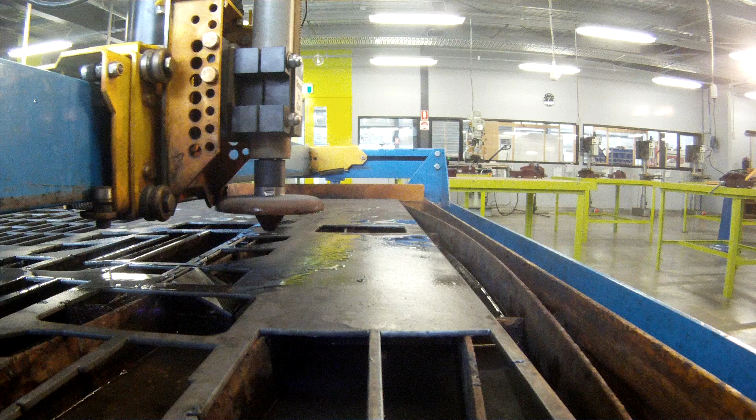In today's video, I'm going to show you how to design and make a fabricated vise via the use of Autodesk Fusion 360, CNC and manual machining and fabrication processes. So sit back and relax and enjoy the video. Let's get started.

Okay guys, so I've exported the DXF files out of Fusion 360 and brought them into the Plasma CAM design software. I've nested all the DXFs together to minimise waste on the steel sheet. So let's press cycle start and watch this cutout.

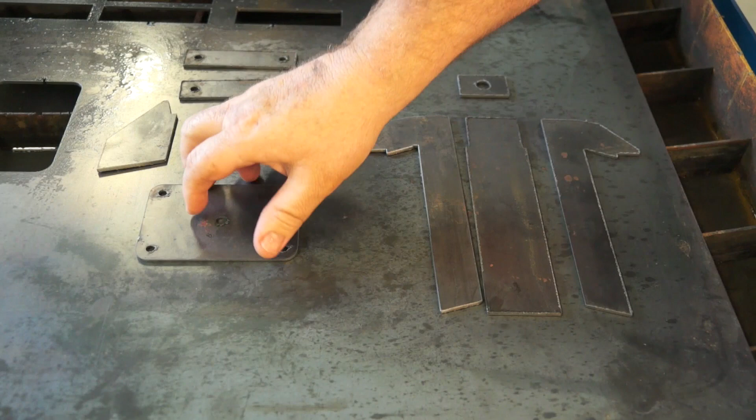And then we have it. All the parts have been cut out with the Plasma CAM using a Hypertherm 65 amp. I had it on a medium setting at about 45 amps, and it's done quite a good job. There's a little bit of dross on the back of these parts - we'll clean that up with an angle grinder and a flapper disc. But overall guys, I'm quite happy. How cool is that? Straight from Fusion 360 into the Plasma CAM, and I've got steel parts. Awesome.

Righto, I've cleaned all the parts up using the angle grinder with a flapper disc, and as you can see, it's taken off all that dross on the edges of the steel. There was no need to actually grind the hell out of the parts, just had to take that dross off so they'd fit together snugly.

Now if you look over here, I've started to assemble the vise. I've placed the first two components on the welding table. This welding table is made in Germany - it's a Siegmund table, and they're an awesome piece of kit. You can fixture it and clamp it up so it won't move. When I start to weld, I'll do about 4 welds in here - not a continuous run, just 4 tack welds along there, and that should hold it all together.

Now what I like about this design of the vise is that I've designed it so it fits between the gaps in my welding table. And this, of course, being a school for students, you want to try and make this as easy as possible for the kids so they all achieve their goal. Just got to work this out - watch out, this table is hot at the moment and I should have gloves on.

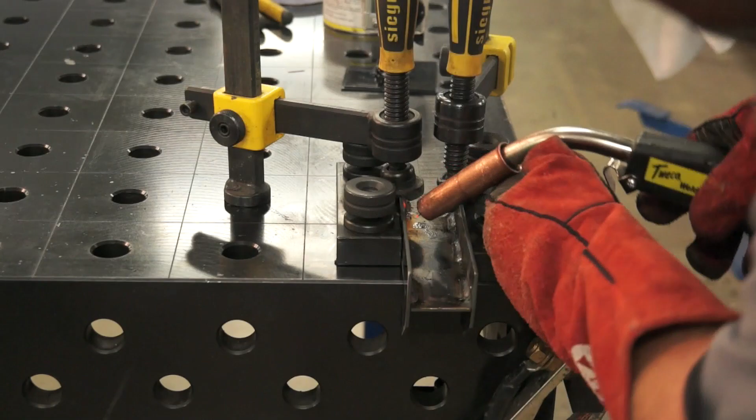As I was saying, guys, I'm not a ticketed welder. However, when you use a good quality MIG welder and a welding table like this, anyone can become a self-proclaimed expert. I'm pretty happy with those welds, even if I do say so myself.

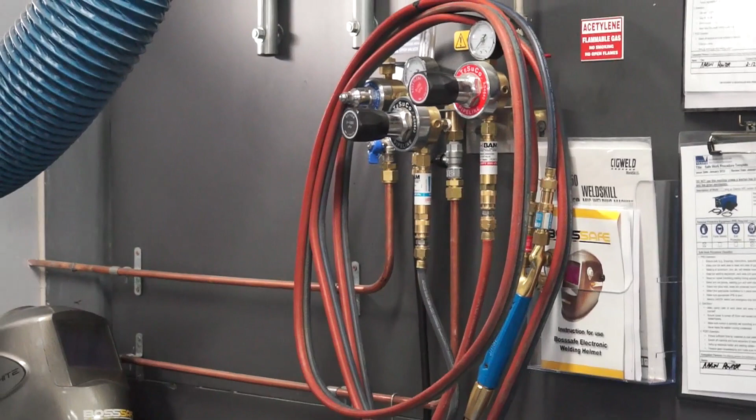Now, if you're wondering what welder I'm using today, let me show you. The welder I'm using here is a CIGWELD Weldskill 350 MIG. It's 3-phase, 415 volt, and it's plugged into a manifold system over here. I don't know if you can see the argon shield line, the blue tap in behind the other ones there. I'm running about 12 litres a minute with argon shield gas.

Okay, I've got the other parts clamped to the welding table. Here's the outside rails, and I've wedged that between one of these square parts here from the welding table, and clamped that together so hopefully it won't move when I weld it.

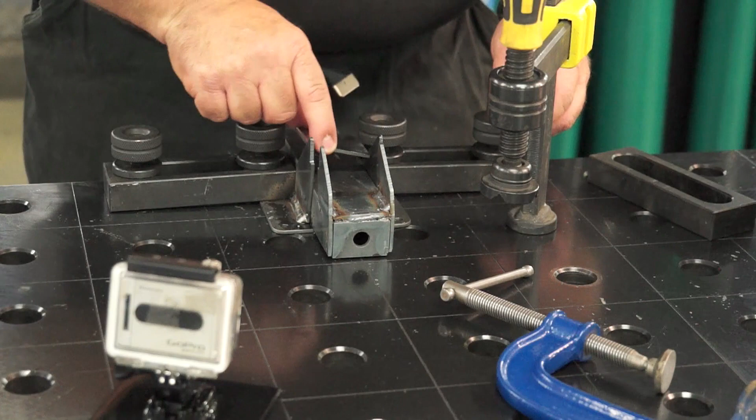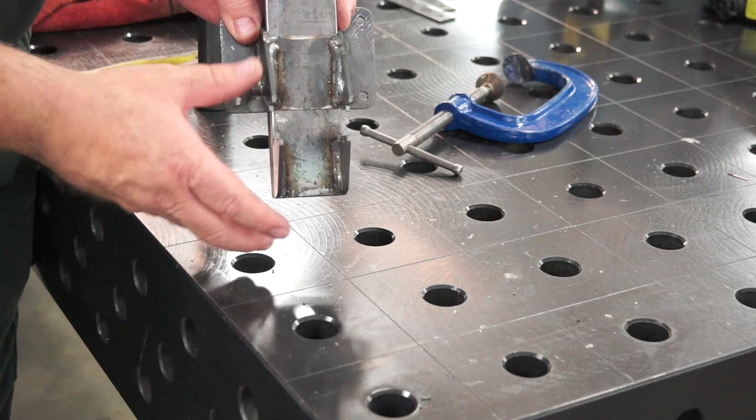Righto, I've got all the main components welded together now for the vise, and it's sliding in nicely. Notice here that the jaws, where they locate, slide in together beautifully. You can hear that little snap in, that little click. That's what we want. Lovely.

So what I'll do now, I've got my 3mm mild steel, and this is what my aluminium soft jaws that I'll make in the Haas will attach to. These will go in here now, and it's a matter of sliding these two parts together, backing it off a little bit, putting them in here, making sure, setting them at an equal distance, and hopefully everything will be good.

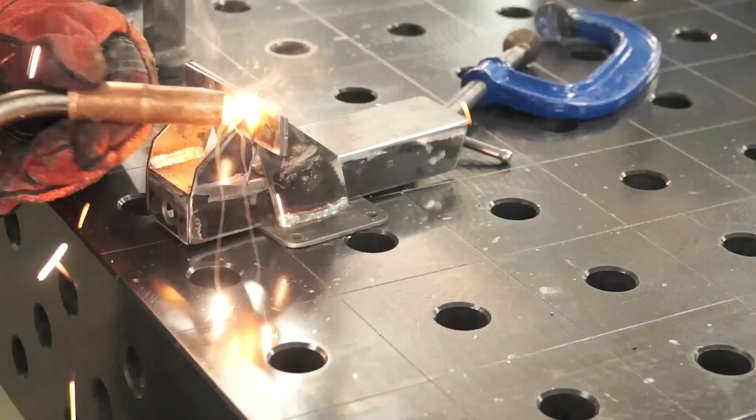So what's happened here, guys, is that I tried to take a shortcut and made a mistake. Obviously, most of the time you don't see that in YouTube land because people edit it out. But what I did wrong, instead of clamping this jaw into place, I tried to cheat and take shortcuts, and it caught me out. When I welded this side, I should have tacked them both before I welded. I welded here and it's pulled this up on an angle, like so. So I'm going to have to heat this up now with the oxy and try and fix it.

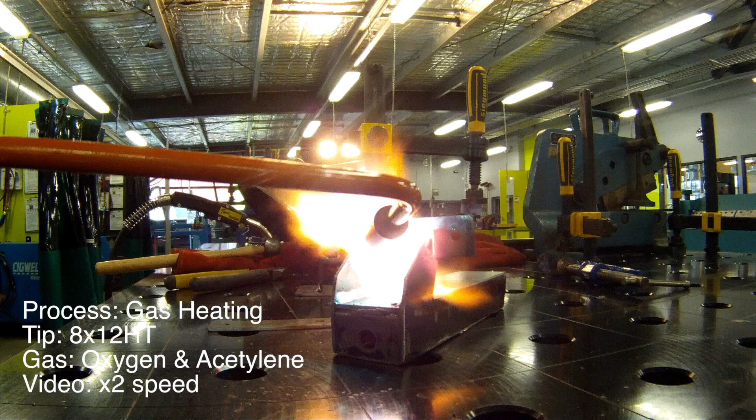I'll give that little knock to see if we can move it.

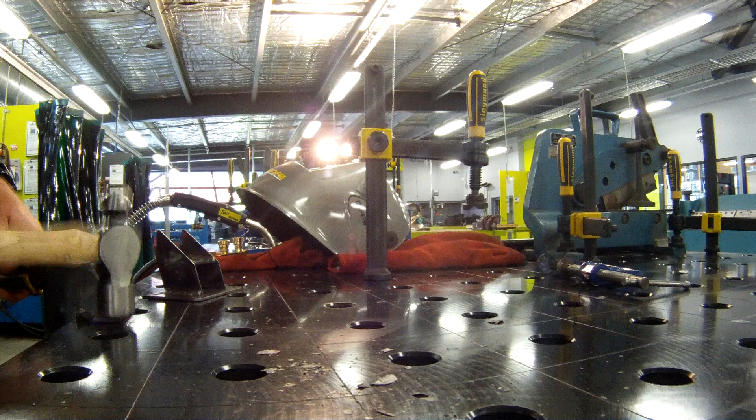I think I got that, guys. Fantastic.

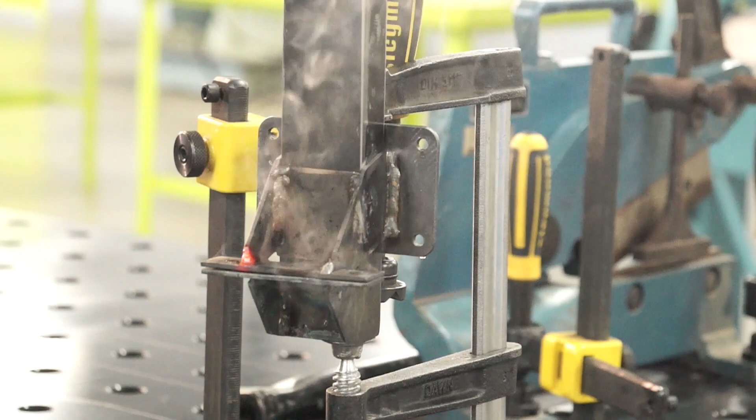Okay, it's all done, guys. Now let's do some CNC.

Here we have my assembled vise. You can see the front jaw and rear jaw of the vise here. I'll open that up now to show you how I actually did it in the model. First of all, I drew the rearward facing jaw first, and then I mirrored it, let's have a look at that, we can show you as I go.

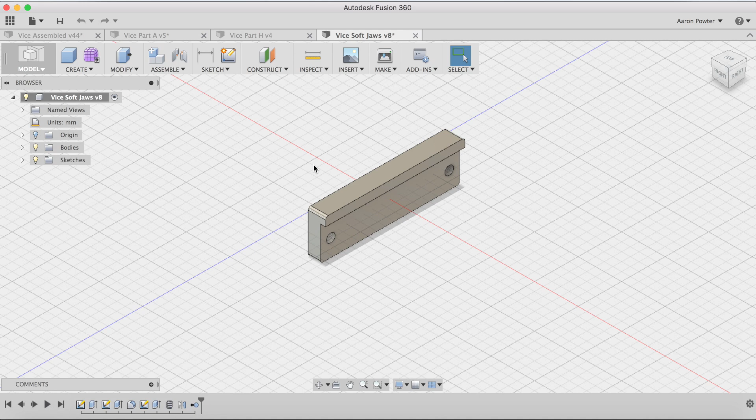And then the mirror, and then I deleted the other one. What I did then is applied some toolpaths to this.

Let's just open up the CAM software, and we'll have to regenerate that, Command G, and let's simulate that now. Turn the stock option on. You'll see I'll do a facing cut, another facing cut with a 12mm OD mill to do this backward rebate.

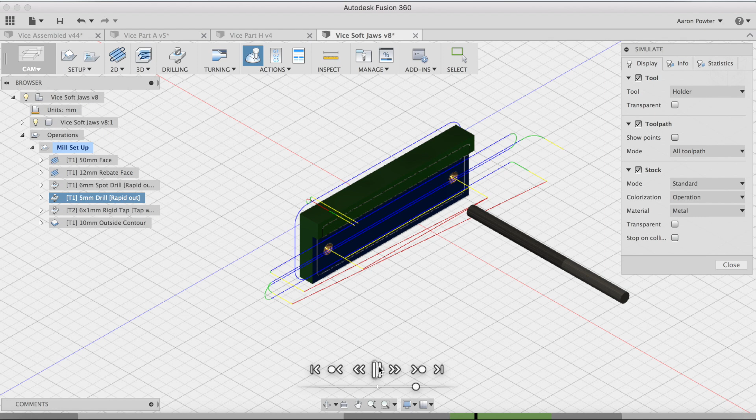Spot drill, 5mm drill, 6mm by 1mm pitch rigid tap, and a 10mm end mill to clean up the contour. Okay, let's take it to the machine and let's have a look at it in action.

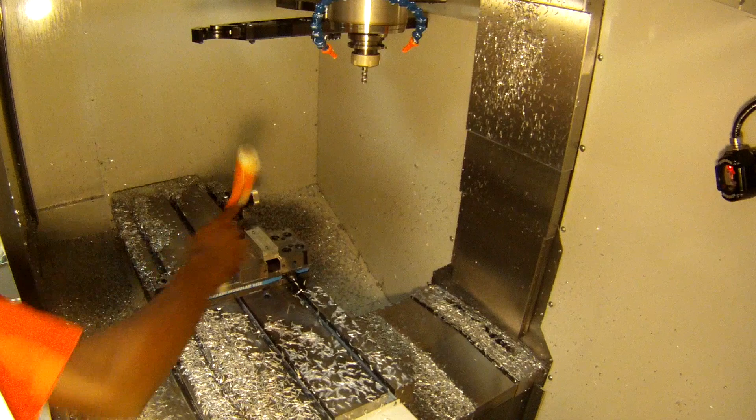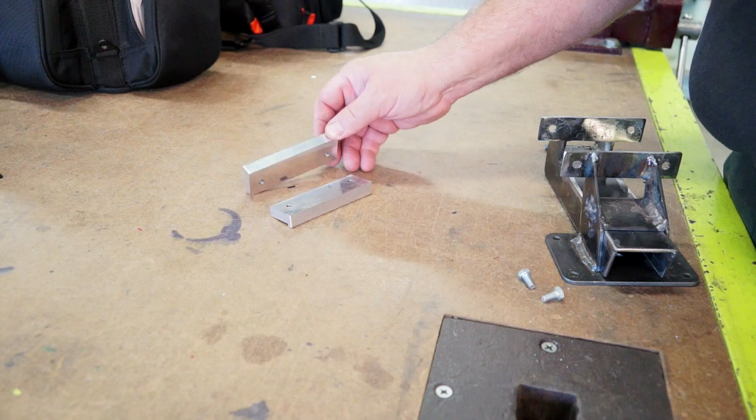I've just pulled the soft jaws out of the Haas Super Mini Mill. Quite happy with the finish and the way they turned out. So what we'll do now, we'll assemble those in the little vise. We'll show you what they look like, just using a couple of 6mm bolts.

First one in. There goes our second bolt. We'll start to assemble the next jaw.

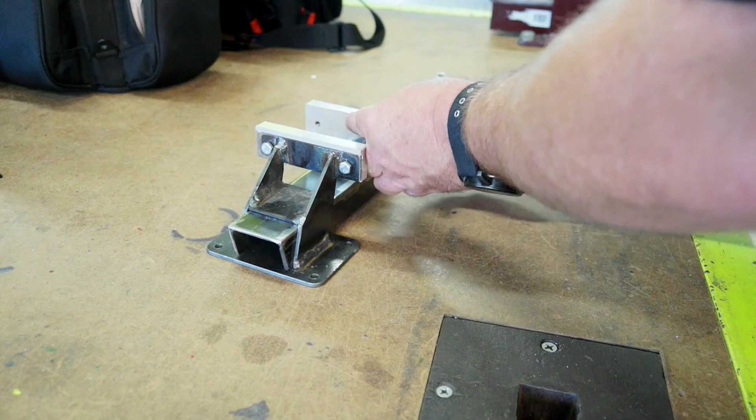All right, now if I just align those a little bit and tighten them up.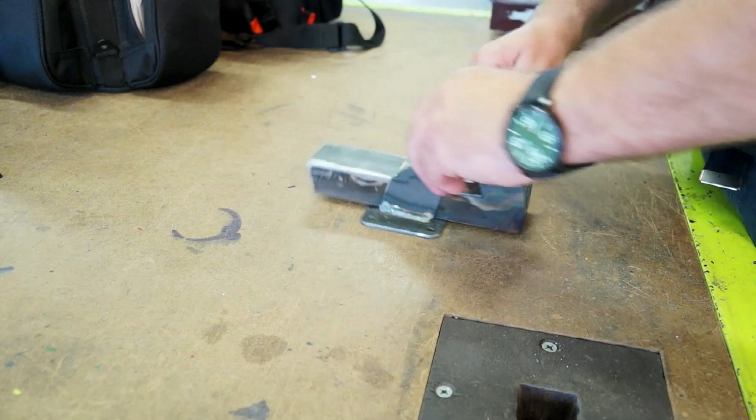Now the jaw's cocked over a little bit there, but I reckon I can fix him later on. But there we have it, guys. Our little vise, at least it slides in and out.

All right, let's make some of the other components.

Okay, here's my assembled vise. I've hidden most of the components to only show you the threaded shaft, the nut, and the handle. Now the reason I've done this is to make it a bit more clearer in the video.

If I open up the actual nut drawing, you can see it's just basically round with two flats on it and a thread through the center. Now when I drew this, I simply drew a sketch, extruded it, and applied the other features to suit.

Now usually when you're doing CNC lathe components, normally you would draw a profile and revolve it. This one is a pretty simple one, so I didn't bother about that. I'll take you into the cam and give you a look at it.

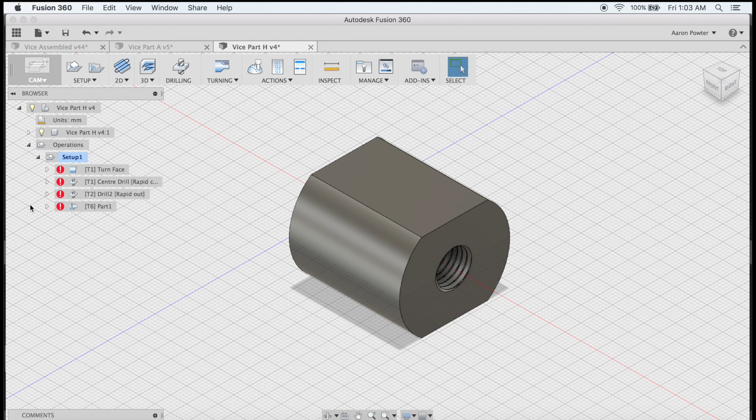So here's our cam setup. I'll just generate that toolpath, Command G on a Mac, and let's just simulate that. I'll bring it down a little bit and simulate, stock sim, turn it on. Just move this down a little bit more so you can see it.

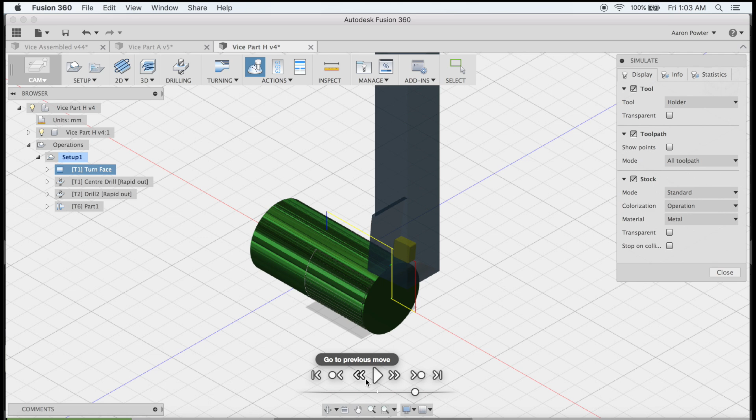So basically here I've got a facing operation, a center drill, then a drill through the center and a part off. Now the rest of this I'll finish off manually in the manual lathe and the manual mill. But let's just take a look at this. There's our drill and our part off. So a very, very simple 2-axis part that will be machined on the Haas ST10.

Let's go and take a look at that now. Got the stock in the lathe here, and this is for the vice nut, and I've just programmed it with Fusion360 cam. Let's have a look.

I'm going to set the G54 first up, so I'll jog it over with tool 1. There we have it. So going to my offset page, call up the G54 over in Z, and it's as simple as pushing the button called Z face measure. Right, shut the door, fingers crossed, here we go.

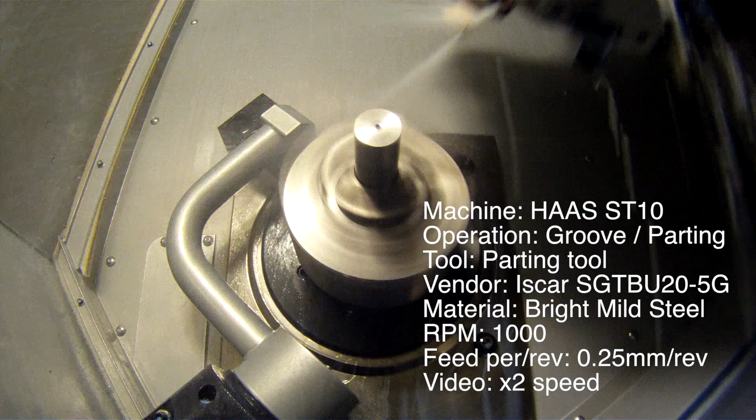How cool was that? That's freaking awesome. There we have it.

Alrighty, okay guys, I'm back in on the manual lathe here at the moment, and I was too lazy to change the drill bit in the CNC lathe, so I thought, look, I need to do some manual machining anyway, so I'll just do the pilot hole on the CNC.

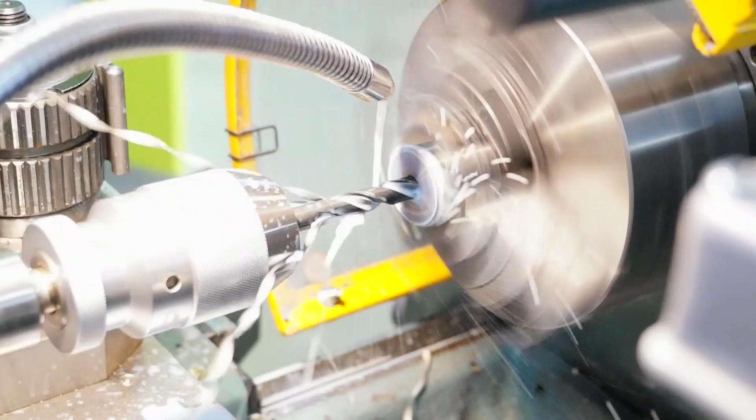And we're through. Now what I like to do is put the tap into the drill chuck, and that ensures I keep it parallel when I start my threading.

Now, this isn't a machine tap, guys. This is just a standard high-speed steel tap, not carbon steel. It's an M12 by 1.5 pitch.

So to work out the size of the drill hole I needed, it was 12mm subtract the pitch, so 12 subtract 1.5 gave me 10.5. A little bit of oil on our bit.

Now I'm not going to start the lathe because this is a hand tap, not a machine tap. I'm going to lift up the chuck guard, which drops out the interlock. I don't know if you heard that in the video, I'll drop it down again for you. Have a listen. That little click ensures I'm not going to start the motor and kill myself, and I'll also drop the motor out here on the lathe. Here we go, just bring it up by hand, start turning the chuck.

Now the first tap I'm using is a tapered tap. Then I'll go in with my intermediate, and finish with a plug. Once I go around, I'm going to back it off and repeat the process again. I'm going to fast forward this bit so you're not bored.

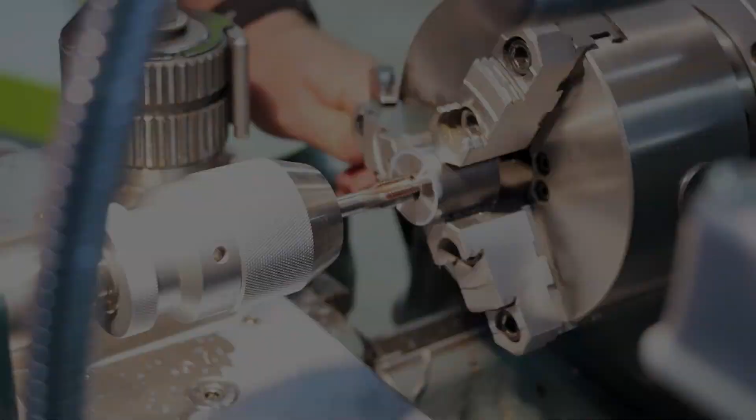I've finished with the tapping. I've got a plug tap here. I've already been through with a tapered tap, an intermediate, and now it's my plug, or commonly referred to as a bottoming tap. I'm just going to start that in the thread so I know I'm not cross-threading it.

I'm going to bring up my keyless chuck and lock onto that, tighten it with the chuck key, and go really slow, guys, right down on the RPM. I'm around about 140 RPM.

Now, I usually wouldn't do this. Like I said, this isn't a machine tap, this is a hand tap, but I've already tapped the thread. I'm just going to clean it out with the plug, make sure it goes all the way through.

We know that's clean, and I'm right through the other side. I've just had a look, so we put it in reverse now and get it out. And we're finished. It's that simple.

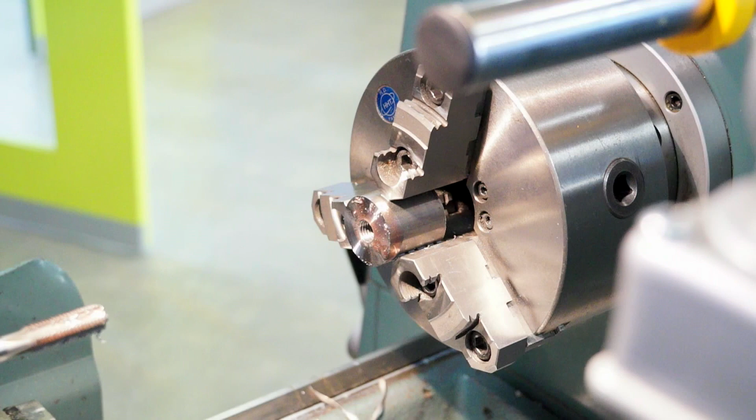Now we're going to take this part over to the manual milling machine. We're going to mill two flats on it using a shell mill.

Righto guys, I've got the part set up on the milling machine over here, the knee mill. I've got a set of parallel strips in there. I'll zoom in and show you so you can have a better look.

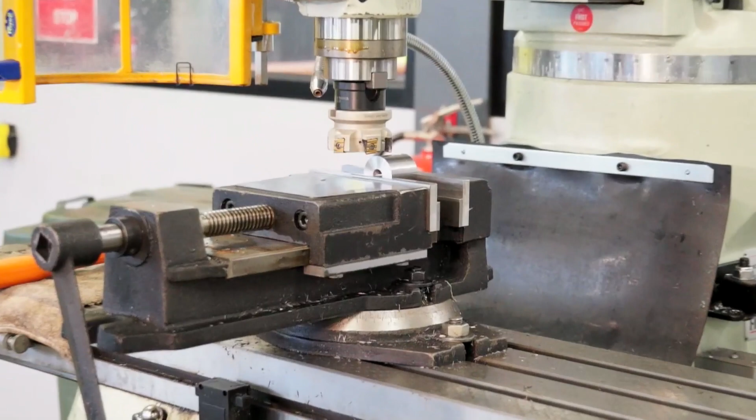Alrighty, so the part's sitting up there nicely. I've set zero on the DRO. Now, the part is 35mm diameter. It needs to be 28 on the flats total. So 35 take away 28 is 7. Divide 7 by 2, so I need to take 3.5mm off the top surface and 3.5mm off the bottom surface. Let's get to it.

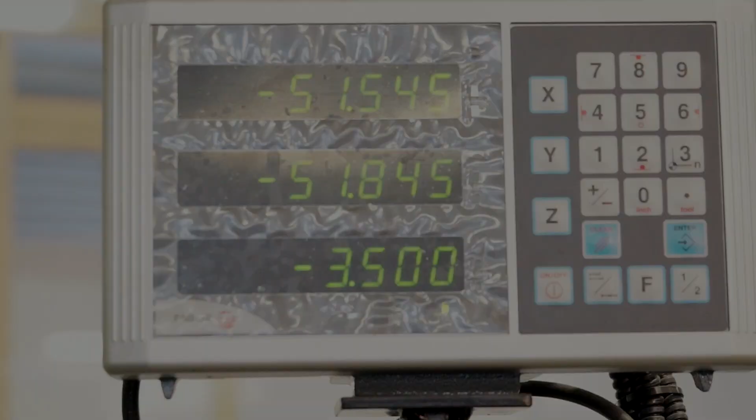Righto guys, I've got my minus 3.5 dialed in on the DRO in the Z, and I'm going to use the X and the auto feed to cut through that now. I'm using a carbide shell mill, commonly referred to as a face mill. It's an ISCAR product with 5 inserts in it. I'm going to take that in one bite. I won't go too heavy on the feed rate, it should eat it like butter.

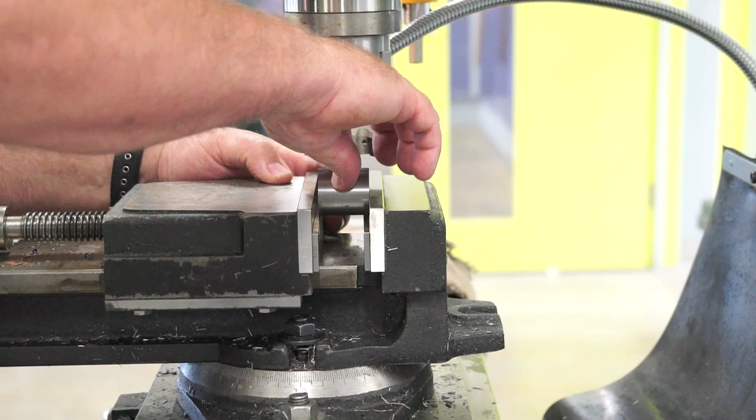I've turned the part over now and reset it back on the parallel strips. Make sure we give it a good whack so it's sitting flush on those parallel strips. What we're going to do now is dial in the DRO to 7mm, which gives me my 3.5 on both sides. Here we go, up she comes.

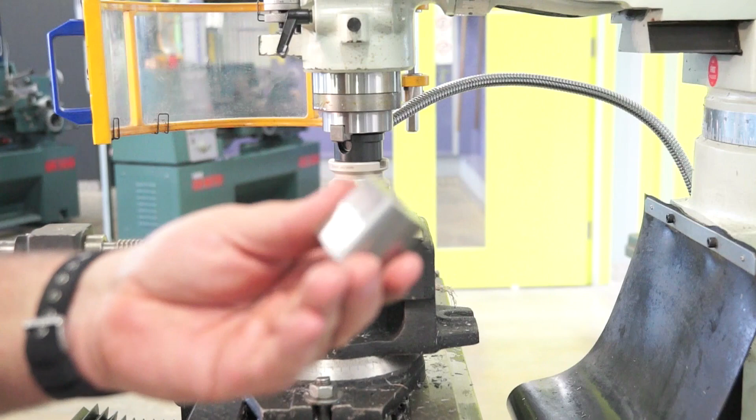And definitely no mucking around then, guys. There we have it, perfect flats on both sides. Ready to go, and that's our vise nut.

Forgot to start the camera before, and unfortunately I missed all this manual machining part here. I may have captured a little bit on my iPhone, so I'll stick that into the video if I can remember to do it.

So what I've got here, guys, I've got the job in the chuck. This is actually the threaded handle that the nut will attach to and allow the vise to be pulled in and out. The thread will live along this part here. Using a grooving tool, I'll put a groove here as a thread relief, so when I'm cutting the thread, it will drop into that.

I'm going to manually cut this thread now. I'm going to go minus 0.25.

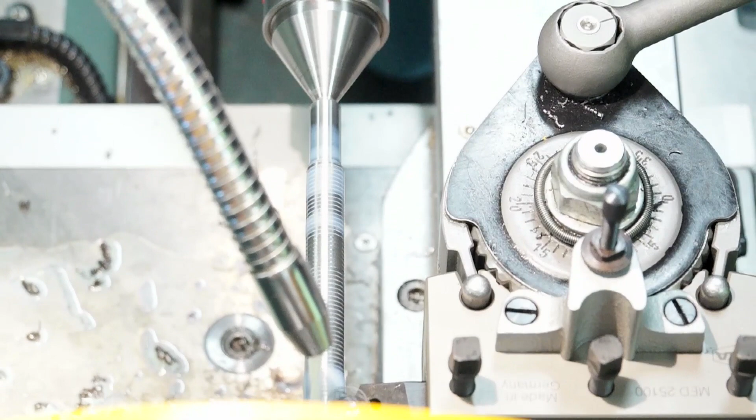Now I was going to do this entire shaft in the Haas CNC lathe, but I thought this would be better for the students to do manually. There's a lot of skills and processes they can obtain from doing this. So I'm leaving the half nut engaged. I'm going to reverse the lathe now, and that way I don't disengage the half nut and lose my thread.

Now a lot of machinists do it this way. There's going to be a lot of you out there saying, why don't you disengage the half nut? The way I was taught to do it was via this method, and it reduces the risk of missing your start point on your thread. It is paramount, however, that you back off your tool when you're reversing, otherwise you'll break the tip off it.

Okay, I've finished machining. I've got my shaft and the thread on it, and I've got the nut. What I need to do now is mark the nut where to drill in the centre an 8mm hole, and mark where the vice handle goes and where the split pin goes.

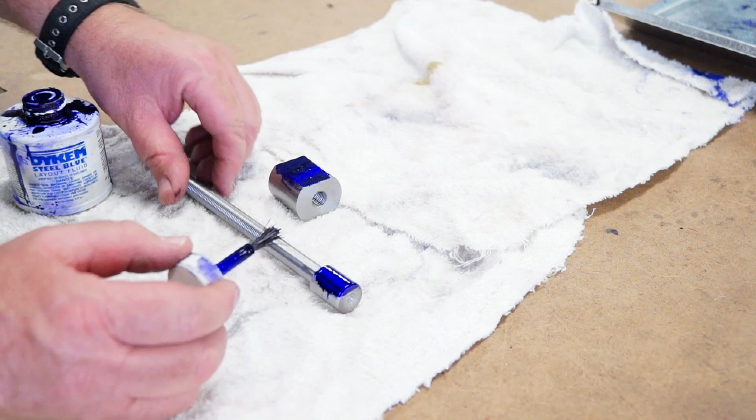And paint the top of that. Just paint that there, and at 90 degrees I'm going to put some layout fluid there. And just let that dry for a moment.

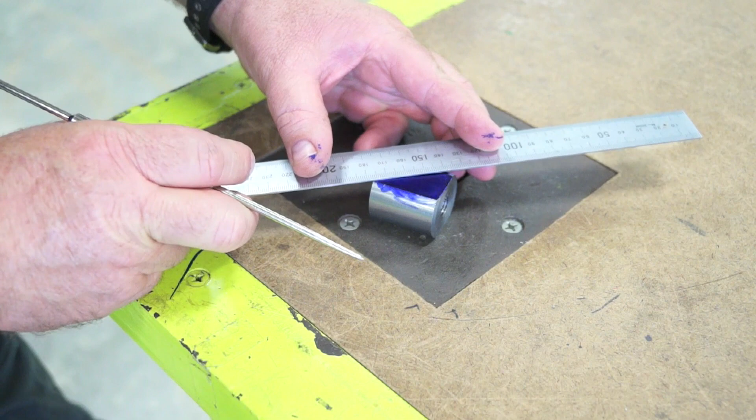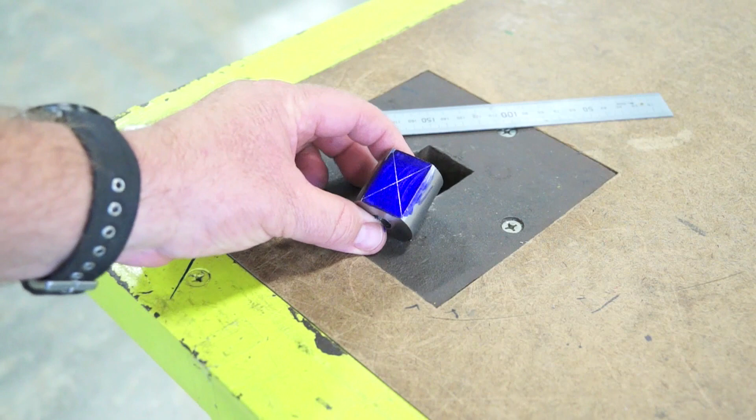So now I'm going to find the centre of this block here. I've used the layout fluid, I'm going to go corner to corner, and that should give me the centre. So with my steel rule and scriber, now due to the layout fluid being on there, I don't have to press really hard to get a mark transferred onto my job. As you can see, guys, I've got lovely diagonal lines, and now I can locate the centre. Now I'm going to just stand my scriber up on that point.

Again, find that point that I made previously. Okay, one hard whack. We now have the location of where to drill that 8mm hole.

Let's set that RPM on the drill. So remember, 320. Now we're using high-speed steel, and we're drilling into mild steel, okay, so that's 30 metres a minute. Now let's divide that by 8mm, and we need an RPM of about 1200.

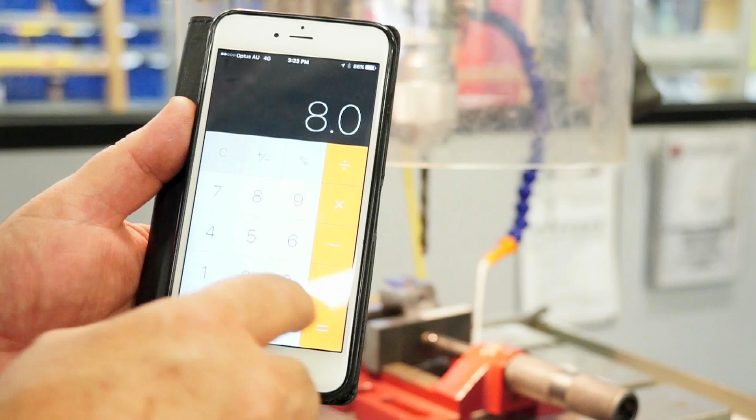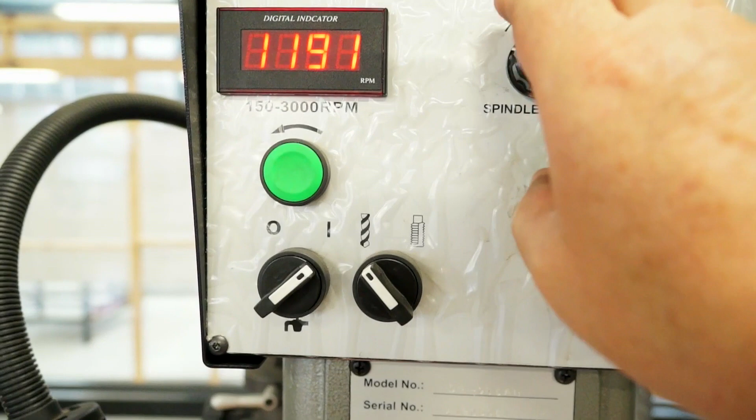Away we go. Just doing a little bit of peck drilling here. Try not to get coolant on my good camera lens. And there we have it.

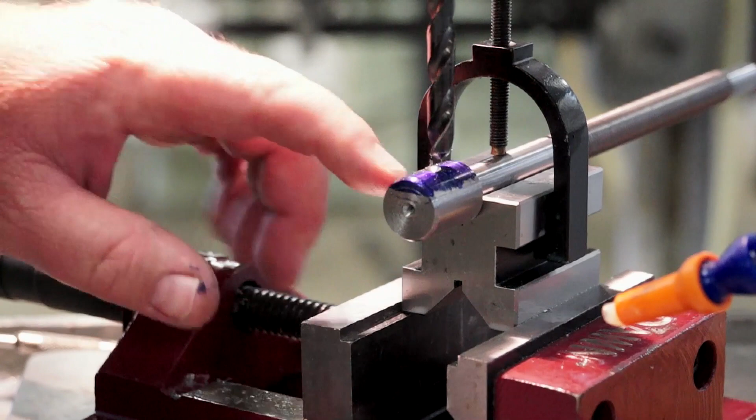I've got the handle set up in the V block now, and I'm going to drill the 8mm hole for the handle. I was just trying to align it there. We should be right to go. I'll have to check it as I'm drilling, make sure I remain on centre.

More coolant. We're going to drill a 3.2mm hole here now for the split pin. I always try to run coolant, the reason being better life out of your tools, better finish to your work. And we're through.

Okay, now comes the hard part. Usually if you've got a second person, this is a lot easier. I'm working alone at the moment, but we need to compress that spring like so and poke that split pin through.

Okay, now we're just going to bend it over on each side and we're pretty much done. There we have it, it's in there nice and tight.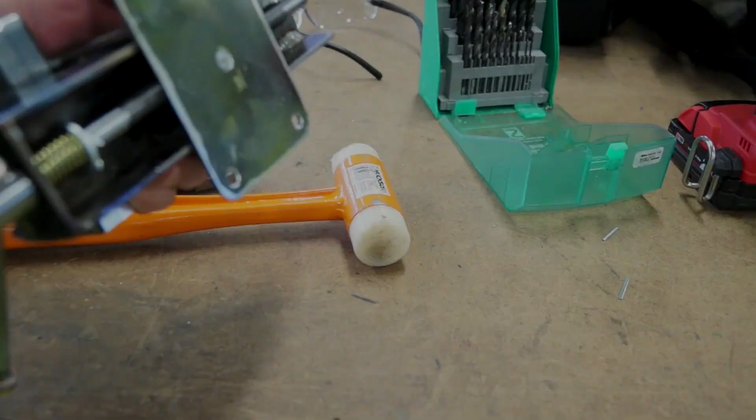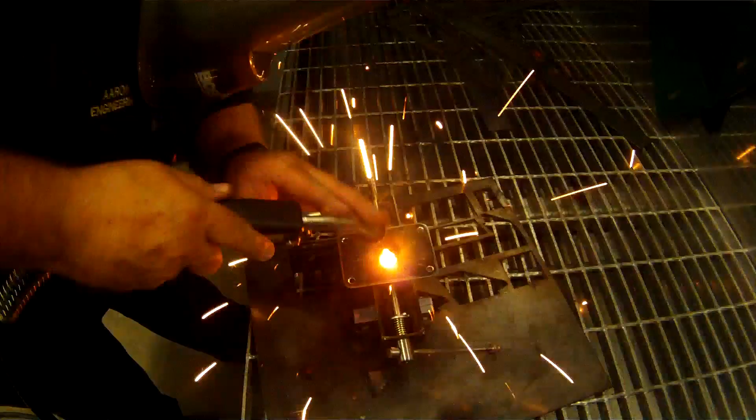That concludes the video for today. Hope you've enjoyed it, a Fusion360 sheet metal fabricated vise. How cool is that? Now, I know it works, I proved the concept was done in Fusion360, of course. There's nothing like making it and just making sure that it all fits together. What I'll do now is go ahead and make these with my students.